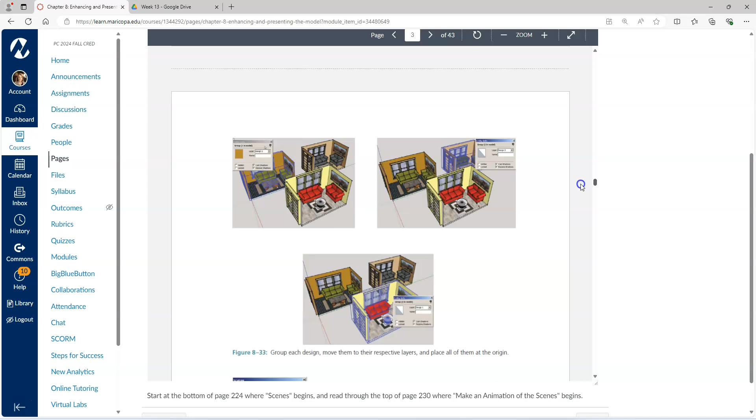Our reading for this week is going to come from chapter 8. We're going to skip the first part of chapter 8 and come back to it before we finish our final models. So this week we're going to start at the bottom of page 224, where scenes start, and take it through the top of page 230, where 'make an animation of the scenes' starts. This is at the very bottom of the reading assignment, so if you forget the page numbers, I've got that down there.

So we are learning about scenes tonight. Scenes are essentially just views in SketchUp that you can save - basically taking a snapshot of your model at a given angle with whatever properties you have at that time. You can save all of those settings so that you can come back to it later.

You'll find your scenes in your default tray - there should be a panel labeled Scenes. To create a new scene, you just hit the little plus button that says Add Scene.

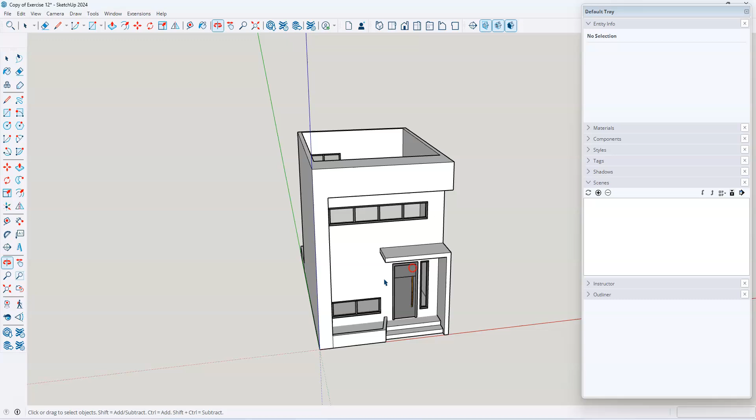So there are two ways you can do it. You could either navigate first to the view that you want of your model - let's say I'm getting myself nice and situated, I like it right there. Whenever I hit that plus button to add a scene, it will go ahead and create that scene for you. Now it's called Scene Number 1 in my scenes panel, and it shows a little thumbnail, basically a screenshot of what I'm looking at right here in my model, and that has saved this view of the model.

You'll see I also have a tab now at the top left corner that says Scene 1. So your scenes are found in two different places: either in your default tray, or in those tabs across the top of the page.

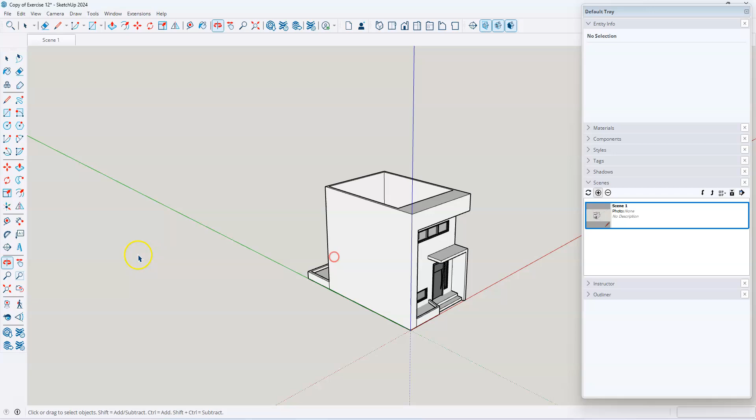So it saved. Now if I go do something else, I'm looking at the back of my model, and then I want to go back to that same view as before. You can either click on that little tab in the top left that says Scene 1, and your model will automatically take you back to where that snapshot was. Or over in your Scenes panel, just double click that scene, and it'll also take you back to it.

If you right click on this scene thumbnail, you have a couple of options: delete the scene, rename the scene, or update the scene. We'll talk about updating the scene in just a second. So let's say I wanted to rename this one as maybe Front 3D.

That'll update it to Front 3D, and it also updated here in my tab. You can access those same settings from the tab. If you right click on that tab, you see those same options: delete, rename, update. There are a couple of others here too, like adding a new scene from this menu.

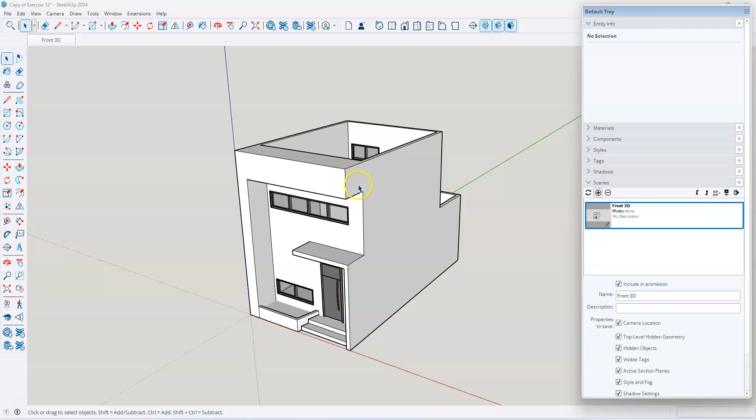Let's talk about being able to update a scene. So I saved my scene here of my Front 3D, and you can always update it to be something different than what you originally did. So if this was my original Front 3D and I've decided I want to come in a little closer and navigate myself a bit more toward the top of the view, maybe I want this to now be my Front 3D scene.

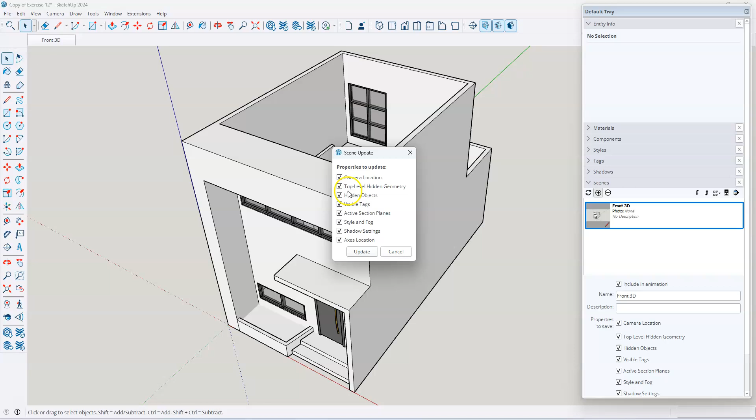Once I navigate to that new view, I can right click over in the Scenes panel and hit Update Scene. It'll ask me which properties I want to update. So if I only wanted to change the camera location and keep all my other settings, I can just uncheck all of those. Updating will then not overwrite those other things — it would just overwrite the camera location. Once you decide which properties to update, you just hit that Update button.

Now you'll see in my thumbnail over here, the scene did change. If I navigate somewhere else and then double click back here to go back to that scene, it did save those new updates — I just hit camera location, unless you have other changes you want to make. And we can look at some of those other things that can be different between scenes.

Yeah, we can look at some of those now. One of the things you can change per scene is shadows. So let's say in my front 3D, I'm going to turn on my shadows. I can do that up in View and check Shadows.

Now that I've turned on those shadows, I need to update the scene. It's not going to save just because I was looking at that view and then turned shadows on. Each time you make a change you want to save in the scene, you have to update the scene. Right now, even though I just turned my shadows on, if I go back to that front 3D and double click, my shadows turned off because I didn't save those shadow settings to the scene.

Now let's try again. If I go up to View, turn those shadows on, and then right click my scene and hit Update, I'm just going to update everything. But if I only wanted to change the shadow settings, I could uncheck all the other things so they do not update, only the shadow settings.

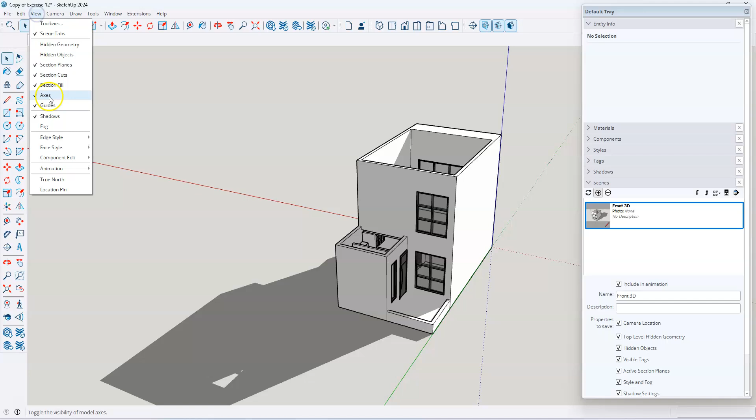So now that I've done that, let me try and navigate around. I'm going to turn my shadows back off in my model. But if I go back to that front 3D, shadows turn back on because I saved the shadow settings to that scene. Got it.

We can also change the projection type per scene. We've looked at our different perspective settings where we did parallel projection, which gave us more of a two-dimensional type of view versus just a normal perspective.

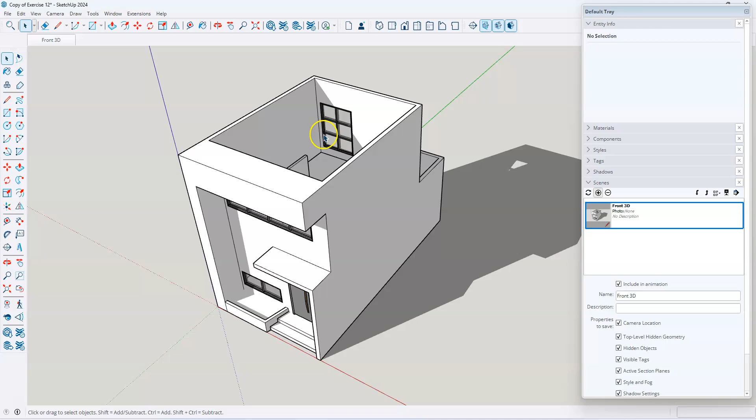Let's try adding another one. Let's say I want to look at just a straight top view. I'll go to camera, standard view, and hit Top view here. And I'm going to change my perspective to a parallel projection.

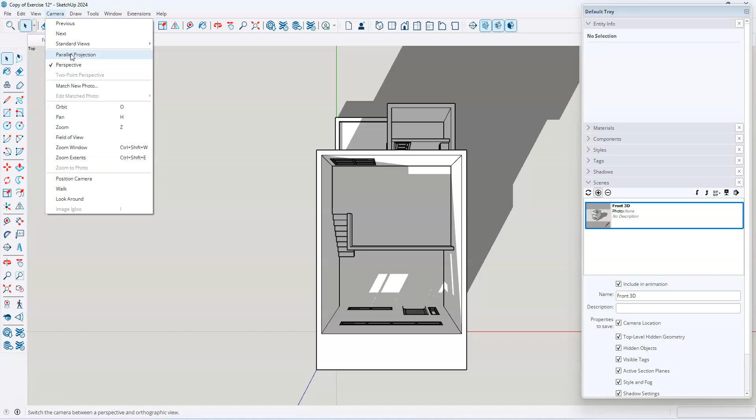And that made it more of that two-dimensional view. Then I'll go ahead and add a new scene for this top plan view, and rename it Top View.

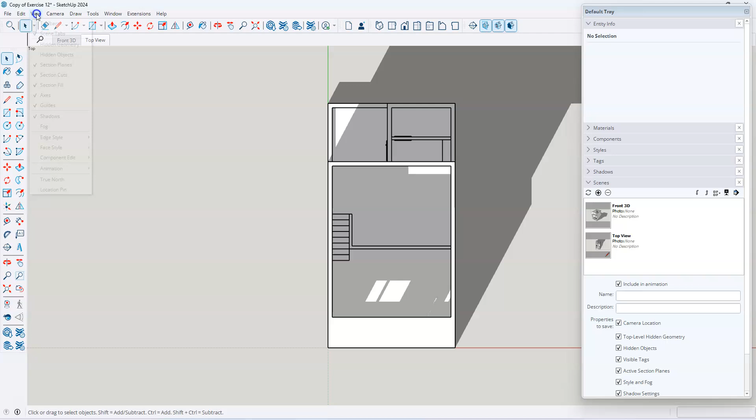Okay, and maybe I don't want my shadows on for this view, might be a little bit confusing. I'll turn those shadows off, so I need to go ahead and update my scene.

I'm going to navigate back, let's try it in my tabs this time. I can just click my front 3D tab - those shadows came back on, and it's still in that perspective mode. And then if I switch over to my top view, shadows turned off, and it's that two-dimensional parallel projection.

So you can see how these things are saving per view, and they're not necessarily affecting each other. I can have all of these different things going on with different scenes. With me so far? Okay.

Some other things that we might change per scene, let's look at my tags. Oh, this is a ton of tags in it.

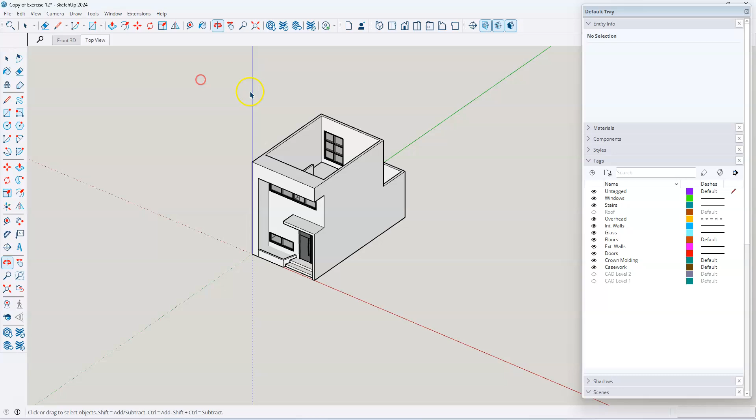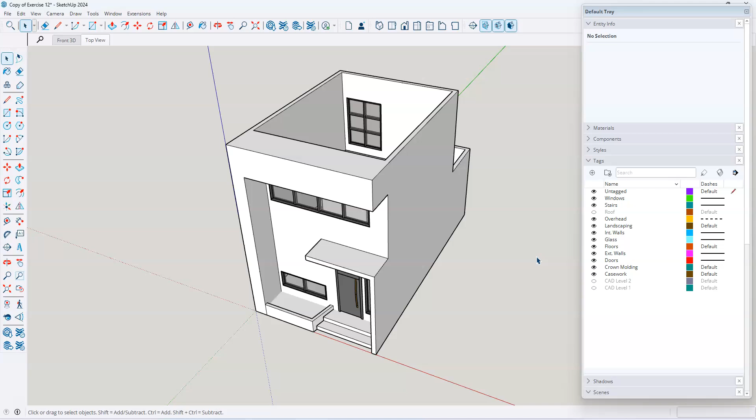Let's say I'm going to create a new tag, and maybe this tag is for some landscaping. I'm going to go pull in some landscaping from the 3D Warehouse.

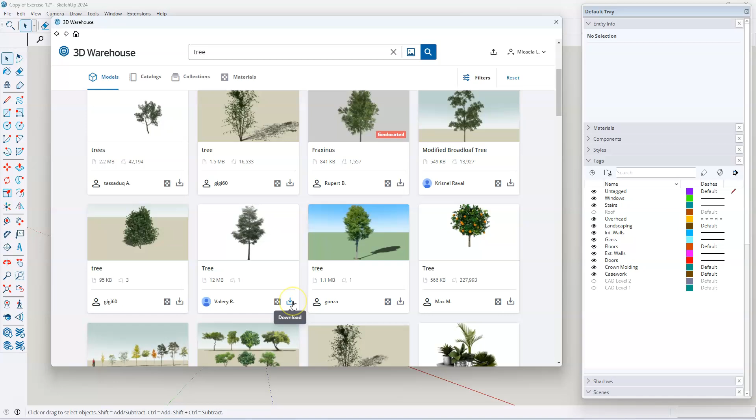Let's see what they have. Do they have a tree? They do have a tree. Let's see, ooh, this nice symbol of a tree. There we are.

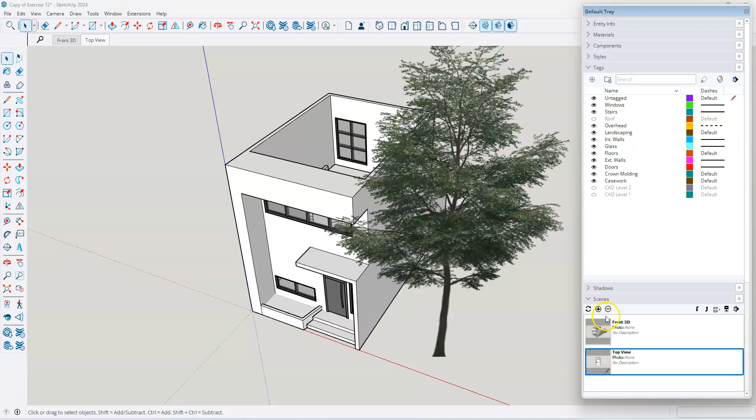This tree I'm going to put on that landscaping tag I just created. So I've got that tag turned on here. Let's go to my front 3D - it's got my shadows and my tree.

And let's say in my top view, we can't really see the tree anyway. Let's try it. Maybe I'm going to do a view from back here. And for whatever reason, I don't want that tree to show in this one.

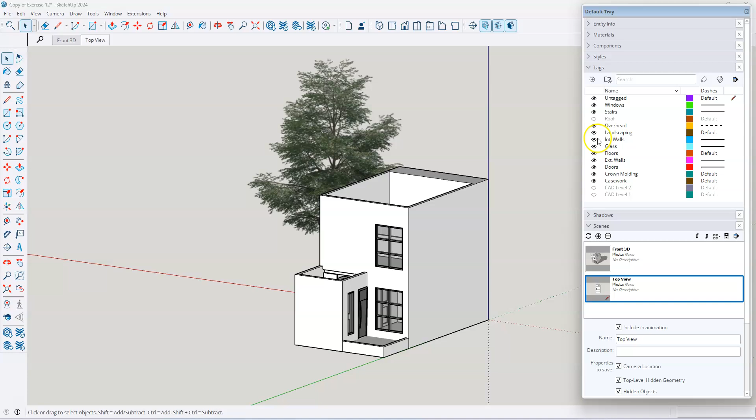So I'm going to turn off my landscaping tag, and then I'm going to create a new scene called maybe Back 3D.

Alright, so let's go back to my front 3D - my tree is on, my shadows are on. Go to that Back 3D - the tree is turned off because I turned off landscaping for this scene. So you can toggle on and off different tags to save to your scenes as well.

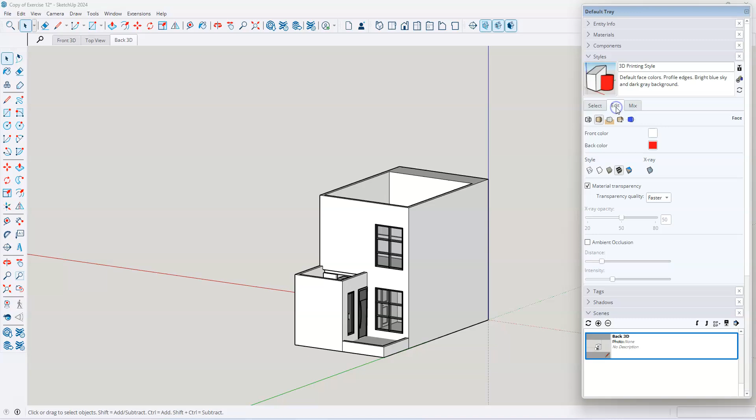Maybe in this back one, I also want to change my edge settings. I'll go to my Styles, over to the Edit tab, my edge settings. Maybe I want to do the color by axis on this one. Now that I've changed that, I need to update my scene here, so I'll right click and hit Update Scene.

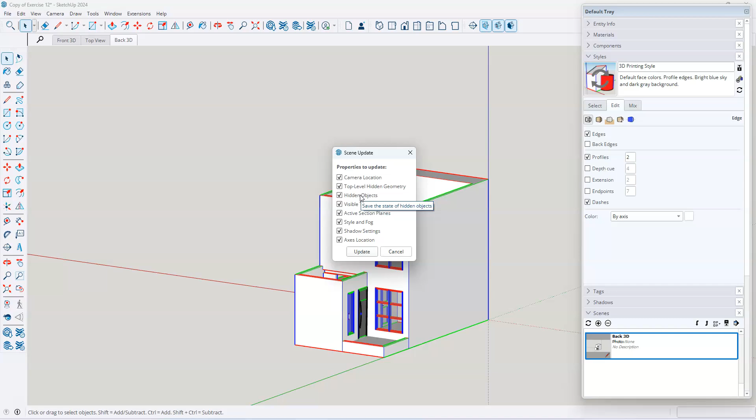Again, check things that you do or don't want to update, or just update all of it. If it asks you about creating a new scene and style, you can make new styles if you want, kind of like those default styles.

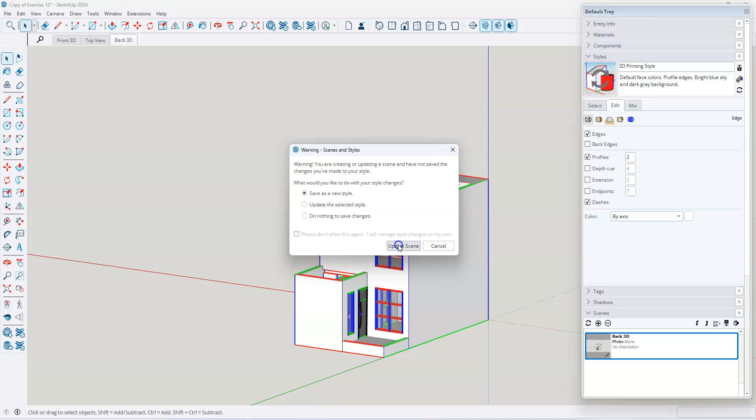It doesn't really matter for us right now, just with what we're learning. I just update the scene. Okay, and then if I go back to that front 3D, everything has those black edges on it. Back to my back 3D, those edge settings stayed on. So lots of things that you can be saving, going back and forth between your different scenes, depending on how you want each one to look.

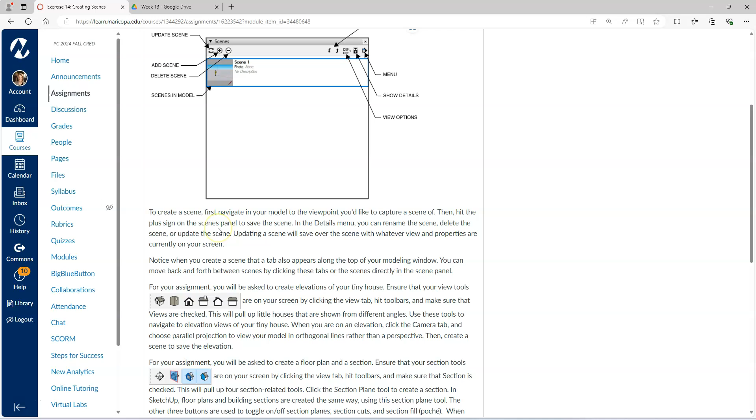So as part of today's assignment, I did kind of add in some of the things we're talking about here, just as a reference. But your assignment today, we're going to be creating scenes for an overall 3D perspective, all 4 elevations of your tiny house, a first floor plan, a second floor plan, and then a section longitudinal, going long ways.

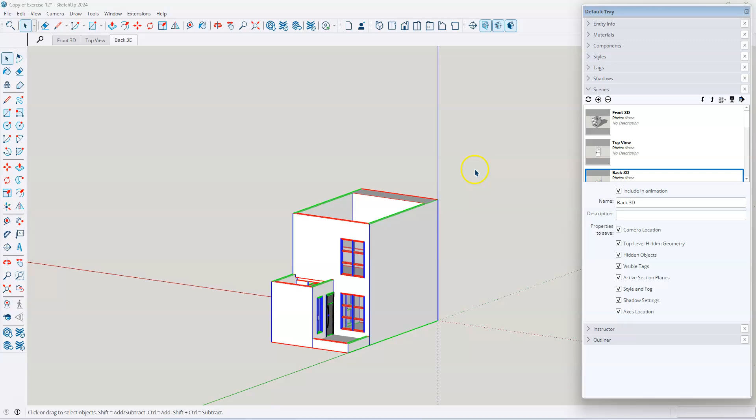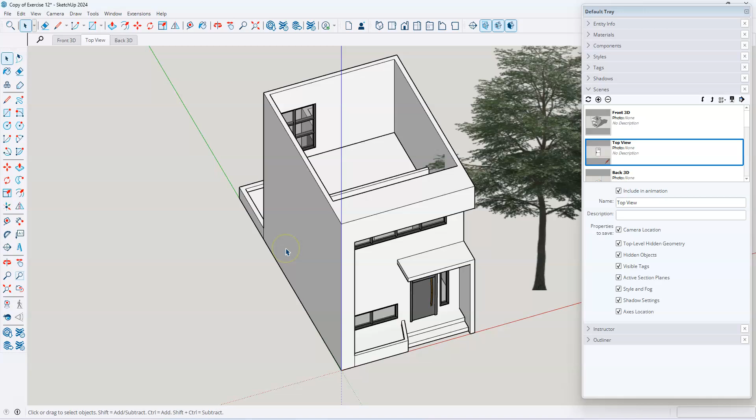So let's start to look at how we might create some of those scenes. We did look at a perspective one so far. Let's look at how we might change our top view here to be, this is kind of like a second floor plan already. But for a floor plan, we usually kind of chop the house at a certain level so that we're not seeing the second floor, we're only seeing the first floor.

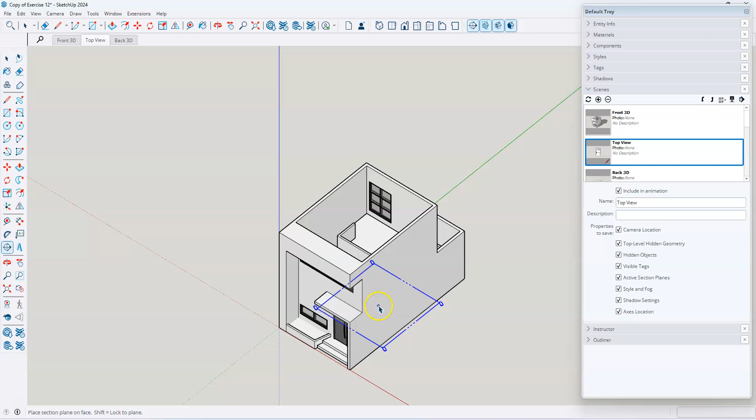To do that, I'm gonna get rid of that tree. It's just like a section, but it's being cut horizontally rather than vertically. So I've got my section tools already up here. I'll click on that section plane. I'll keep it on this blue axis because I want it to be cutting horizontally. And I'll just go ahead and click to place it. I'll call this one my first floor plan.

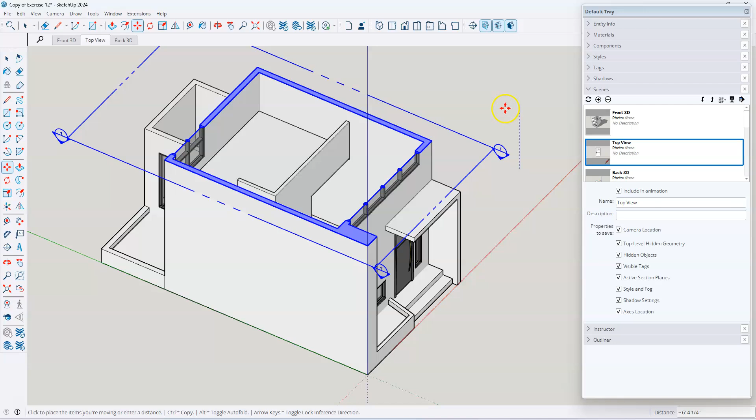Okay, so now we see that's being cut across the top here. And again, you can just click on that, use your move tool to move that up and down depending on where you want that cut plane to occur. Let's say I'll do my, I don't know if I want those cabinets in there, so I might just cut it right there.

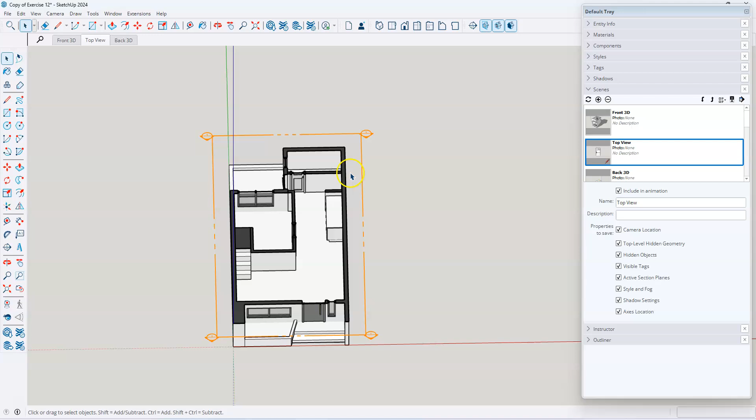And let's see here, I'll go back to my top view real quick. And you see it didn't cut that section from my top view. So let's go ahead and if you double click on a section plane, that'll activate that section plane. So I just double clicked on it and now you can see it's being cut. I can just update that scene.

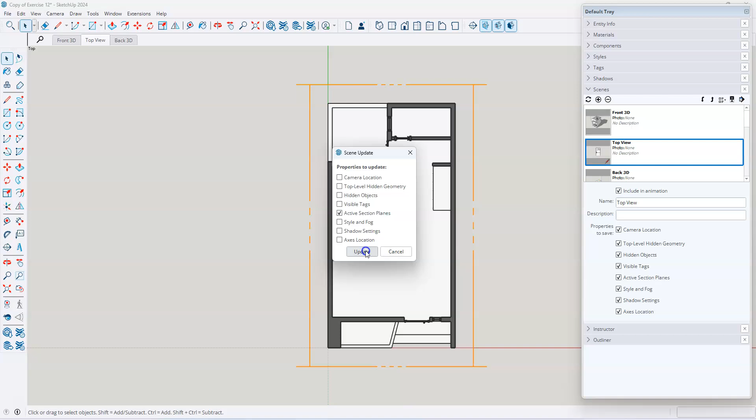And you'll see that one of the properties is an active section plane. So maybe if that's the only thing that I wanted to change, I would uncheck all these other ones and hit update. Now if I navigate away from that guy and I go back to my top view, that section plane is cut and it stays there. And that can be my first floor plan.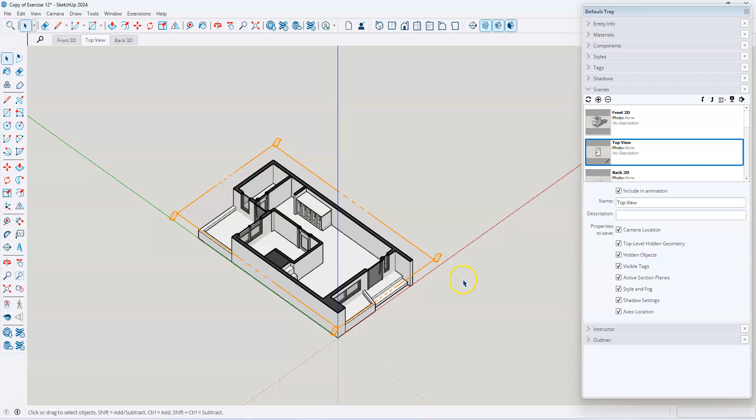Same thing, if we went back to my front 3D view here, even though the section's not cut, you can still see that section plane is there. We can just go back up to our section tools and we'll turn off the display section planes. So now that's not showing anymore. I need to go ahead and update my front 3D scene.

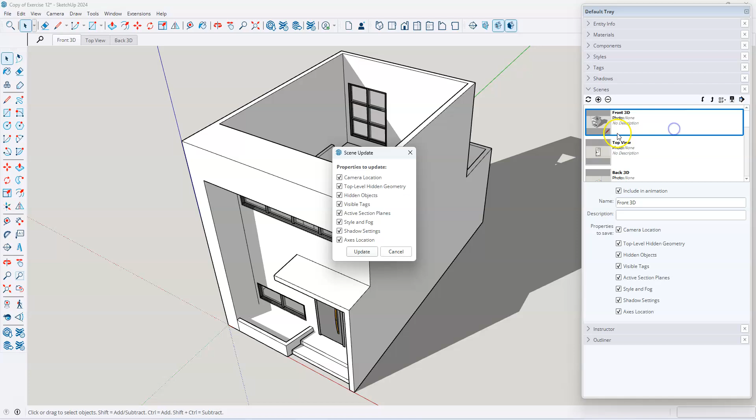Now I'll go back to my top view and back to my 3D view. And now I don't see that section cut at all anymore. So you can definitely be using those section tools to display things that you do or don't want to see.

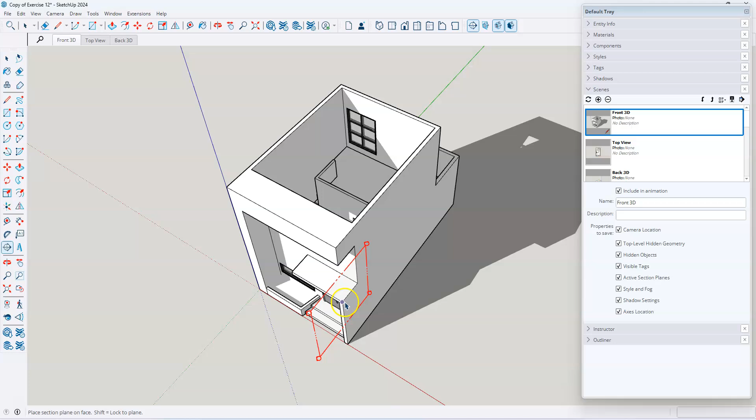We can create another one here. I'll create another section. So we want a longitudinal section as part of today's assignment as well. So I'm using my arrow keys here, left and right, to go back and forth between those red and green axes. Once I find the axis that I want to stay on, go ahead and click to place that guy. I'll call this one my longitudinal section.

So for this one, if I want to relook at the section kind of like this, let's see what we need to do. I want to go ahead and navigate to a view where I'm looking straight on this way.

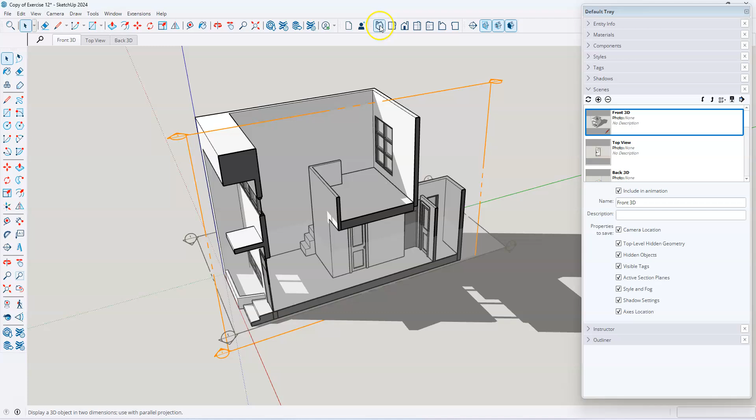So for that, I'll use my standard views. I've got mine pulled up here already along my top bar. This is for your 3D, top view, front, and sides, back, and also the bottom. You can find those under your view and toolbars and just have checked views, and those will show up for you. You can also find those under camera, standard views, and navigate to those different ones here as well.

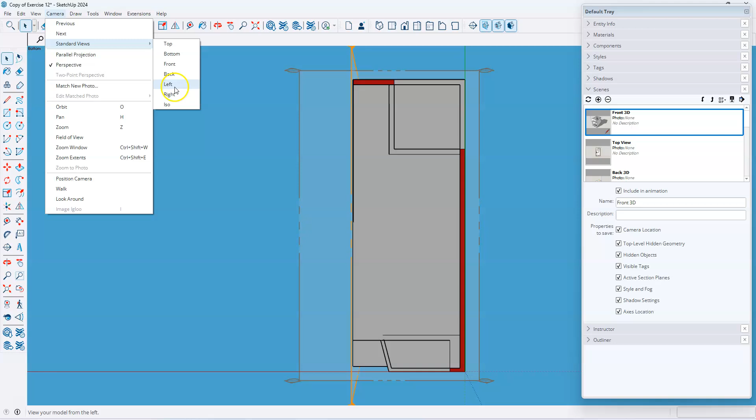So for this one, I want to be at the right side, and I want this to be more of a two-dimensional type of view. So I'm going to turn on parallel projection rather than perspective. You see that turned into more of a two-dimensional view.

I do want this section to be cut, but maybe I don't necessarily want to see it, so I can turn off the display section planes. If you want your poche going on or not, you can turn those on and off.

Once I find the view that I want, I can go ahead and create another scene here, and I'll call that one my longitudinal section. And you see, where did I grab this?

That second bar I just got down there. If you hit the little arrow, the details arrow here over on the right, and hit show details, that's where that comes up, and you'll be able to give it a name if you wanted to give it a description. You can also see which settings you do or don't want to save per view.

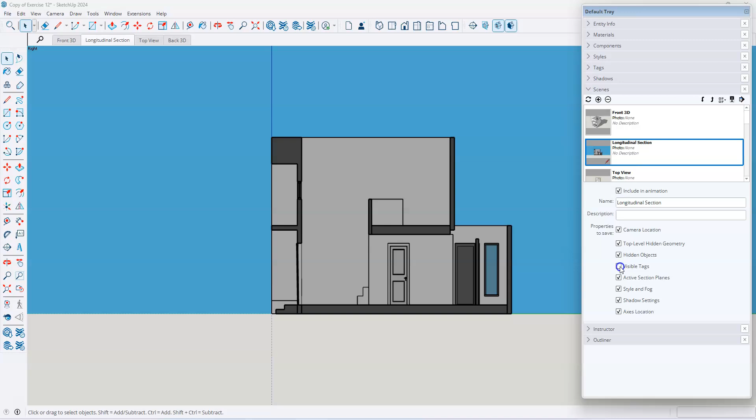Let's say you don't want tags to be at all in play whenever you are updating these scenes. You can uncheck that visible tags, and then tags won't have anything to do with these different scenes. So you can choose which properties are saving per scene.

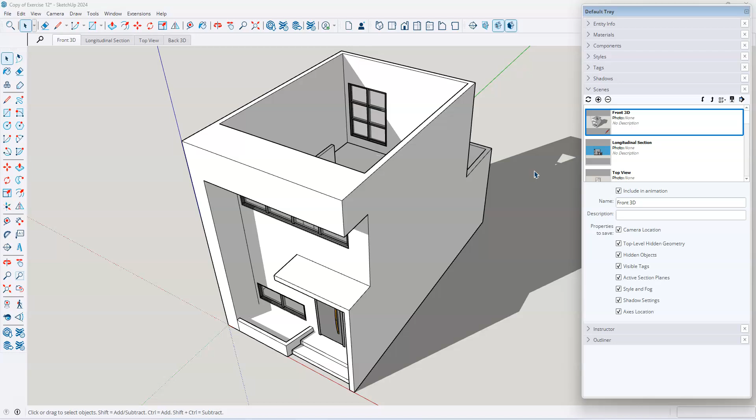Okay, let's see if that one worked. I'll go back to my front 3D view now, and my longitudinal section. Yep, that saved just the way that I wanted it.

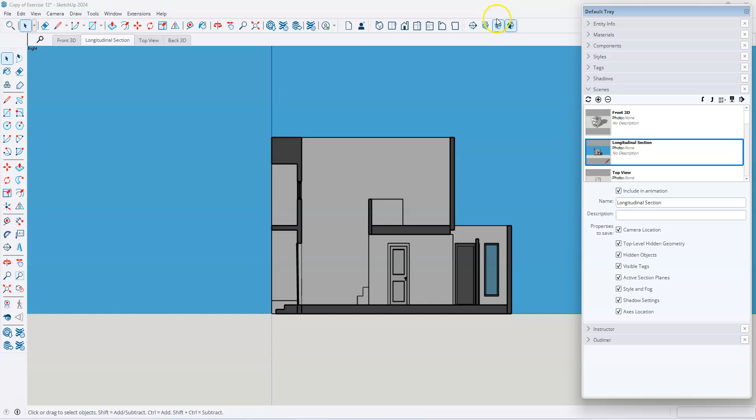We're also asked to do some elevations. This one would be pretty simple to fix from here. I just don't want to display my section cut, so I'll turn off display section cuts, and now I've suddenly got an elevation. So then I can create a new scene.

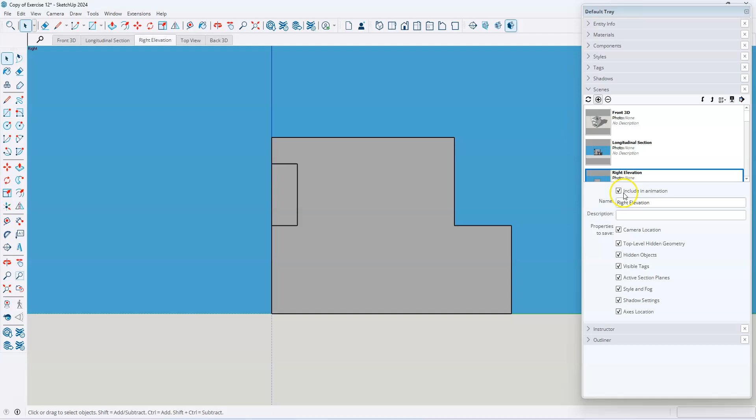Does everyone understand what an elevation is? It's basically looking straight at it. So you only want the elevations of the whole house, not inside it? Right, we're just working on the outside.

You're welcome to create more scenes if you'd like to look at them, but for your assignment, we're looking for an overall 3D perspective, all 4 elevations of the outside of your house, first floor plan, second floor plan, and that longitudinal section. So when you say all 4 elevations—right, left, front, back. Correct.

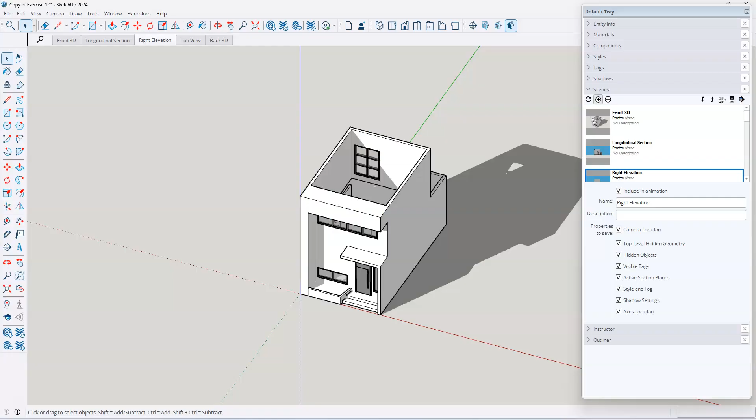Were we supposed to put in the windows and doors? Did I forget to have you do that? Yeah, I'm so sorry, I guess that's part of the homework too. We're not gonna get hit for not having it on there? No, because I forgot. I didn't do it. That's okay, pretty sure no one else did it either. I never told you to put windows and doors into your model. It's okay, that's why I was like, let me ask. It would probably be nice if you want windows and doors in your model, but that's completely on me for not telling you, so if you turn things in without windows and doors, I won't count you wrong, but for your own portfolio you probably want to add some in. I was just wondering, I thought we were keeping it open so we could see through. No, I just forgot. Great to know.

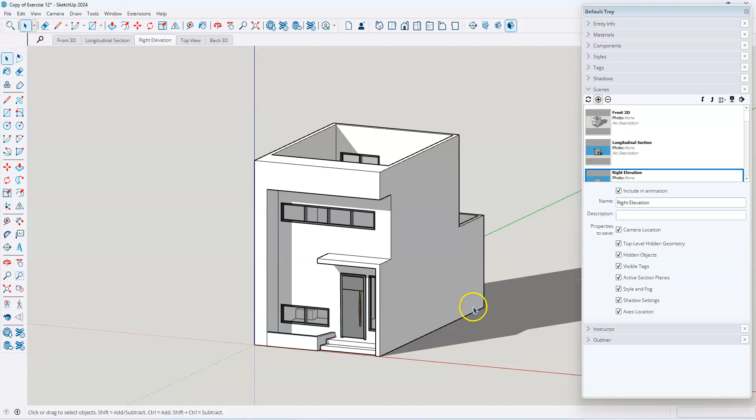Question, does it not have a restroom? I'm sure you already have one. The tiny house? Yeah, I think the back room is kind of like the restroom. Oh, I did that, okay, there's a little back room. Oh yeah, slap them in there again. I didn't do it yet because I thought it was something special we were waiting on. I had no idea, I was like, I'm just gonna add them. That's cool.